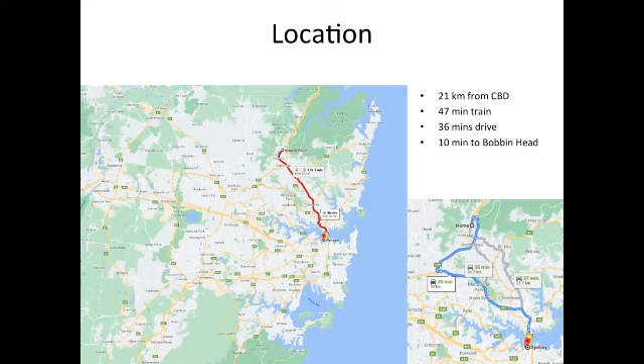And we chose the house because it was within walking distance of a train station. I made these maps of all of the train stations around Sydney, and my family still lives in Chatswood West in the home I grew up in, and my sisters are in Sydney, my older and younger sister, and I kind of wanted to be in the area. So I looked at what could I afford that was within walking distance of a train station.

So being close to the train was really important to me. It's just a 4 or 5 minute walk, and I've run it in about 3 when I'm late for the train. Most people here will probably know all the lovely things about the area, but it's got great shops, parks, great access to bushland and waterways, really lovely schools.

Our kids are at Asquith Primary, gym. We both do CrossFit down at Asquith, and we love getting out in nature on the river in the canoe, and out for bushwalks and things. I do mountain biking, that's my hobby, and we love swimming at the Hornsby Aquatic Centre, and got kids doing swimming lessons there every Sunday. So we love the area and we're really settled in here.

So we chose this house. We bought it in 2016. It was a 696.8 square metre block, about 18.63 metres wide and 37 and a bit deep. So a nice, good block.

It's north facing to the front. From a conventional passive solar design perspective, it's optimal to have north to the rear, into your backyard. But we thought not to worry, it's a great block, it's close to the train station, that's the main thing, and we'll figure out the design to optimize solar orientation if we ever get the chance to knock down and rebuild.

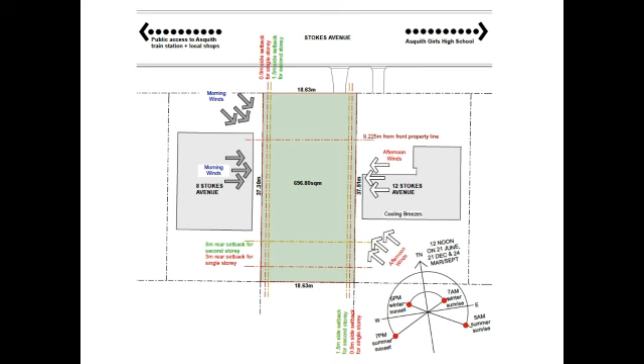So the plans we came up with looked like this: 270 square metre internal area, 5-bedroom house. It's got 4 bathrooms, 2 living, 1 little WC on the ground floor, plus a toilet and ensuite for the guest bedroom on the ground floor. Then it's got an ensuite in the master bedroom and a toilet upstairs for the kids. It's got a ground floor living space and a rumpus room on the north corner, and a study down on the north side as well for me - that's where I am now. It's also got a little gym room, because we're both into fitness, and the garage on the side.

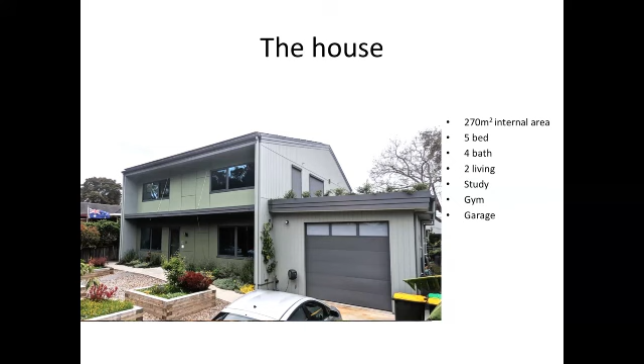The plans turned out pretty true to form, so there's the finished product. I took that today - it was a bit of a grey day, but you can see it really does look exactly like the design, which is always pleasing. And there's one of the more architectural photos we've had taken. It's a timber-clad building, timber frame, well insulated. It's Passivehaus certified, and it's the first Green Star Homes rated building in Australia.

So why is it a sustainable house? Well, we pursued Passivehaus certification, which is a German best practice green building rating system, and we went for the highest rating. There's Passivehaus Classic, Passivehaus Plus, Passivehaus Premium - there's actually only 17 Passivehaus Premium buildings in the world at the time this was built. That involves a slightly higher level of energy efficiency than regular Passivehaus, which is already a very high standard.

So we went a bit above that to get Passivehaus Premium, plus the addition of solar, which in Australia is great. We've got a 20 kilowatt solar system, which means it's net zero carbon, net zero energy and emissions. It produces more energy from the solar on the roof than we use over the course of a year. There are times at night when we've got the lights on, hot water heating systems going, and showers and baths for the kids, when it's in deficit, but it's connected to the grid.

It's drawing from the grid at those times. And then during the day, the big 20 kilowatt solar system is exporting about 3 times as much energy as we use out to the grid. So notwithstanding that we buy energy, like everyone, at 28 or something cents coming in, it's like 9-10 cents going out, because the solar system's so big and it's pumping out about 3 times more energy than we use.

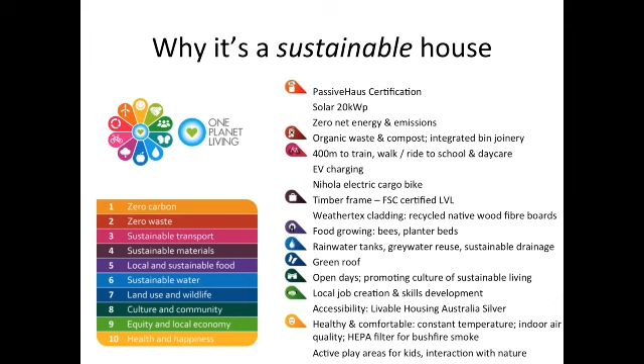So what did it all cost? We bought the site in 2016 for just over $1 million, which is a huge amount of money, but is actually looking like pretty good value based on today's market and where prices are now in the area. So that was just affordable for us back in 2016. And then the construction contract was about the same again. And then there was architectural fees, surveys, etc.

And then some variations and landscaping and planter beds and paths and things that added a bit of cost. So we ended up spending, in terms of buying the land, demolishing the existing house, and then constructing the new house, all the way from beginning to end, $2.3 million in total, which is a lot of money. But we've had the place valued and it's probably above that. It's probably 2.4 to 2.7 now.

So even though we built arguably one of the most sustainable houses in the world, and went a more expensive route than a traditional volume builder, by having a bespoke architect, a bespoke custom builder, and certifying it to the Green Building Council standard, as well as the Passivhaus standard and the Livable Housing Australia Universal Design standard, we've really gone all out, but we're still ahead financially. So we've got a healthy, comfortable house, which is zero net carbon, no energy bills. And in the end, we're still doing pretty well from a financial perspective.

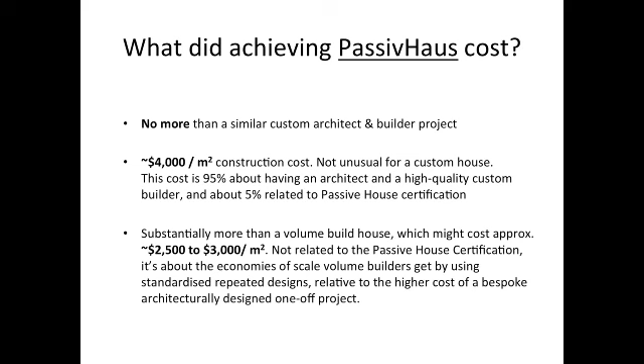It supplies it via a series of tubes into all the rooms via the ceiling, into all the bedrooms, and then exhausts pull it back from little ducts in the ceiling, in the toilets, in the kitchen and in the laundry, and then it goes back through the machine and then out above the green roof actually. But that process of constantly providing the fresh air is what's special and different about a Passivhaus: it's got a mechanical ventilation system. You're not relying on your fresh air to come from opening the windows and doors or leaks through the building fabric.

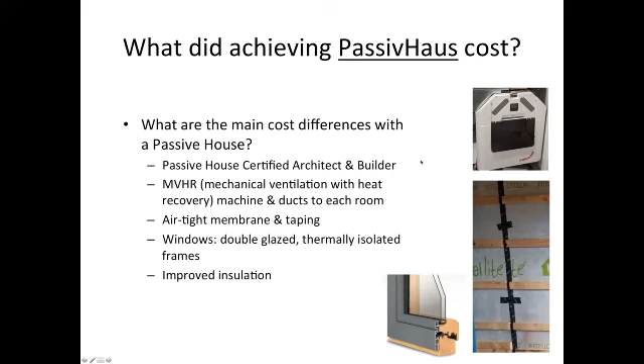And because we did this, we got preferential finance. We got a loan from Bank Australia, who have the Clean Energy Home Loan, for qualifying houses above 7-star in NatHERS, the Nationwide House Energy Rating Scheme, or a passive house. And we were the first passive house to apply for this loan in Australia. So we got a preferential rate on our mortgage. It was 0.6% off the standard variable interest rate at the time, and back in 2019 when we took the loan out, that was a really good deal.

And we've got a fixed mortgage, but it's a discount on the fixed mortgage as well by having this passive house. So there is a financial reward for doing the right thing and building a green home, and other banks now have similar products as well.

So the timeline of the story, we started the process in 2016 when we bought the site. We briefed an architect later that year and got some concept designs done. But eventually I wasn't super happy with what that first architect did, because they weren't passive house trained. So I went back to the drawing board and researched volume builders and got to the point where I'd put a deposit down with a volume builder. But then again, I wasn't happy that they couldn't deliver passive house.

So we saved up some more money. I did a whole bunch of sketches and research and drawing and thinking about how I could make this house into a passive house. And I got a report from a passive house certified designer saying, yep, it would pass if we built my design. Then based on that big process, I briefed an architect who is a passive house certified designer, and he did some concept sketches. Then we did the concept design and the landscape plans, and lodged our DA in 2019.

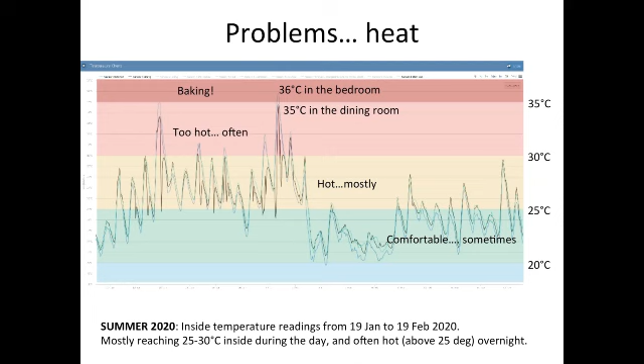I had put temperature sensors in, and in summer of 2020, it was 36 degrees in the bedroom inside. A lot of the time during summer it was in the 30 to 35 degree range, which is way too hot. Most of the summer it was above 25 to 30, often 27, 28 inside. Sometimes it was in the comfortable range, between 20 and 25 on cooler days. But it was really about the weather - whatever the weather was outside, that's what we were feeling inside.

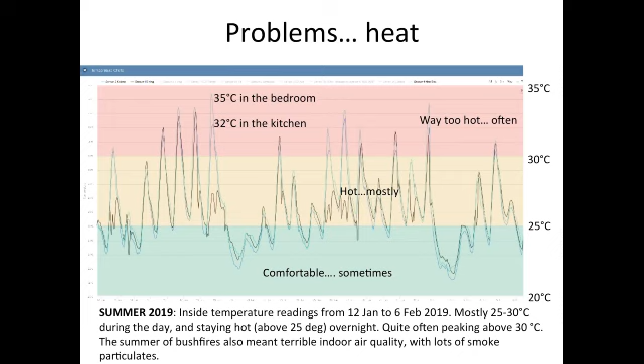Here's the summer of 2019, the previous summer. It got to 35 in the bedrooms and 32 in the kitchen, with peaks way above 30 degrees inside, lots of times. This is a month in summer, I think January through to February 2019, which was a hot summer. But it was mainly way too hot inside in summer.

And of course in summer of 2019, late 2019, early 2020, we had the massive bushfires, and as everyone who lives in the region knows, there was a lot of smoke around from fires, whether that was back burning or the actual out of control bushfires. It brought really bad internal air quality - we were breathing a lot of smoke and particulates in our indoor environment.

And then of course in the winter it was cold. It's 6, 6.6 degrees measured by this temperature sensor outside the old house, and inside it's just 12.6 degrees. This is Tuesday afternoon at 3 o'clock, 12 degrees inside, and we've got the heater on.

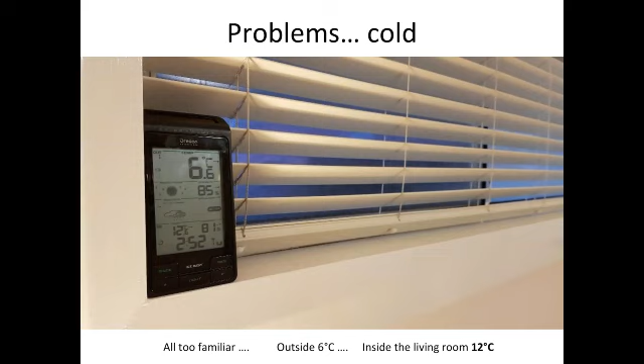This is in the living room. The heater just cannot maintain the temperature because it's single glazing. It's an old house, uninsulated, and you just cannot stay warm inside in those conditions. You have to really rug up and it's not comfortable.

And it's not comfortable for kids - kids watching TV in the winter on the couch had down jackets on and sleeping bags, really rugged up. We had this 2000 watt electric heater, which cost a bomb to run, but it just could not keep the living room warm. We only really warmed the living room in winter and then the kids' bedrooms at night, but it was very expensive to do that and ineffective. It was really uncomfortable.

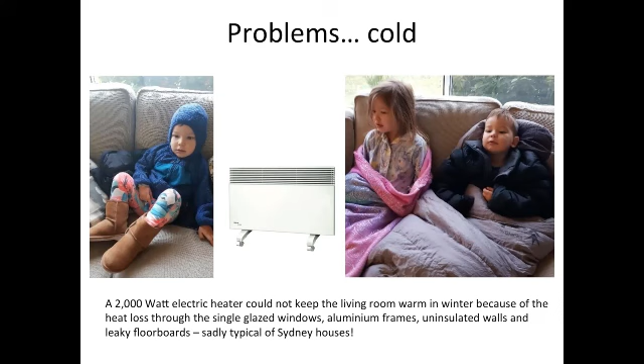And of course all that cold and single glazing means you get condensation on the windows. This is Frankie's bedroom in the morning - she wakes up and there's condensation all over the windows, which trickles down and creates black mold. All around the window frames in the old house had black mold, and it doesn't matter how many times you clean it, it just comes back, because condensation happens when warm, moist air from our breathing meets the cold surface of the glass, forms condensation, the moisture comes out of the air, trickles down the windowsill, and then accumulates and ultimately forms the conditions for mold to grow.

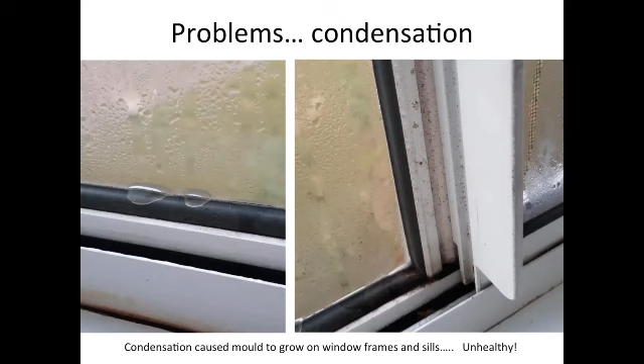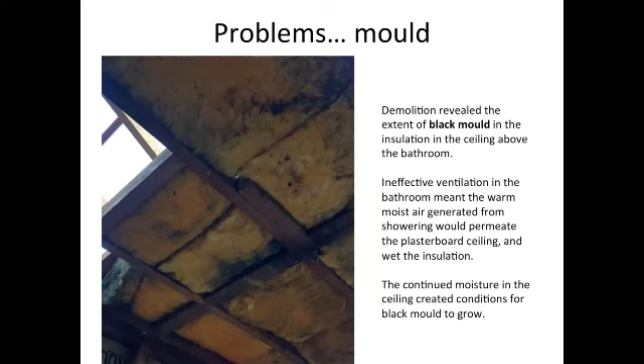And certainly that was true. This is during the demolition, we got to look up into the ceiling void and above the bathroom, the insulation was full of black mold. It was horrible, you know, and that's what happened.

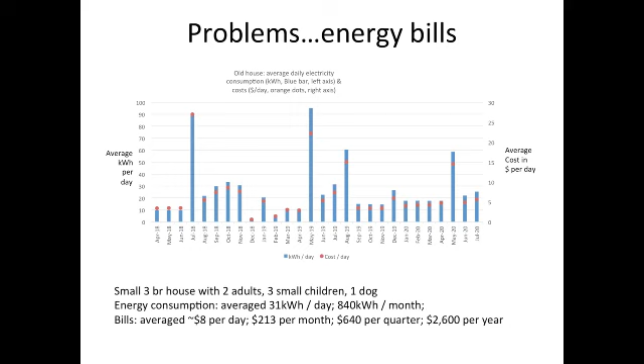And of course it was expensive to heat and cool this building, really inefficient, old, poorly insulated, single glazed, leaky house, cost a lot. There's the old electricity meters and there's the energy costs in kilowatt hours per day. You can see that during winter it got quite expensive, spending a lot of money to keep things warm during those very cold months, which averaged about over $2,500 in electricity bills a year for a really small house.

Anyway, so we had a lot of problems. It was too cold in winter, too hot in summer. It was just impossible to keep it cool or warm due to the leakage through the building fabric, through the cracks in the floorboards, uninsulated floorboards, brick piers down to a void below. You could see daylight through the floorboards, which is classic for an older house. Then we got condensation and mold from the single glazing and the poor quality aluminium frames. We had a lot of black mold in the house, which was unhealthy, and very high energy bills — it was super inefficient.

So, I'm a sustainability person and I knew about the Passivhaus standard and I really wanted to build a Passivhaus, but I wasn't sure if we could afford it or find someone to do it, because in 2016 there were only 4 registered Passivhaus architects in New South Wales. Nobody had any local experience building them because there wasn't one in New South Wales at the time.

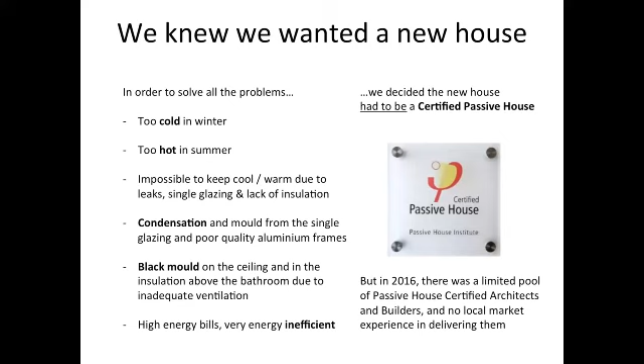But my wife and I met when we were in London. We studied over there and lived there for about 6 years, so it was something we discovered when we were living and working in Europe. It was still relatively new to Australia, even though it's been going in Germany for more than 30 years and in the UK for 20. In Australia, it's still pretty new.

So we hired an architect, and that architecture firm had one Passivhaus certified architect in the team, but the lead architect was not. She produced drawings as the initial concept sketches which were not really consistent with achieving a Passivhaus outcome, then modified them when we said we really want a Passivhaus. We redid it and it was a much more compact form, which is what you want in a Passivhaus — not too many corners, not too many places to tape up and seal.

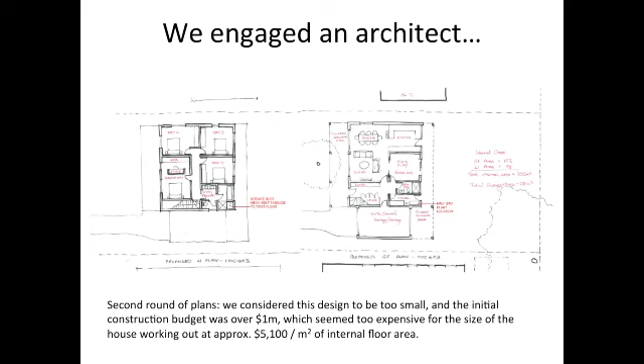She produced a good design, but we got it quoted and it was pretty small and going to be well over $1 million. We were like, oh, we're not sure, so we pressed pause on that. It was going to be more than $5,000 a metre squared, and we said, look, I don't think we can afford that. So we pulled the pin.

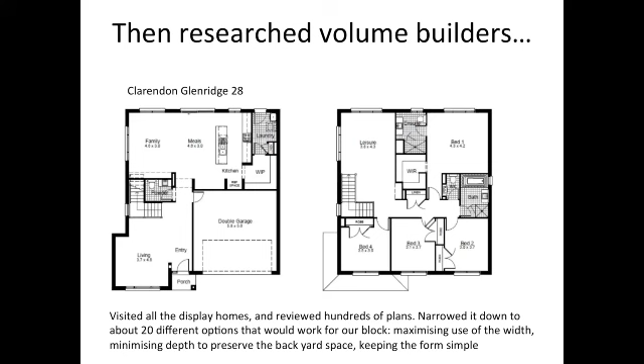So I went back to the drawing board and researched whether a volume builder could build a sustainable house for us. We looked at all of these different volume builders. I looked through hundreds of off-the-shelf standard plans to find one that would suit a wider block and use the width of the block. These were kind of my final selections, which were all good and would have worked on the block.

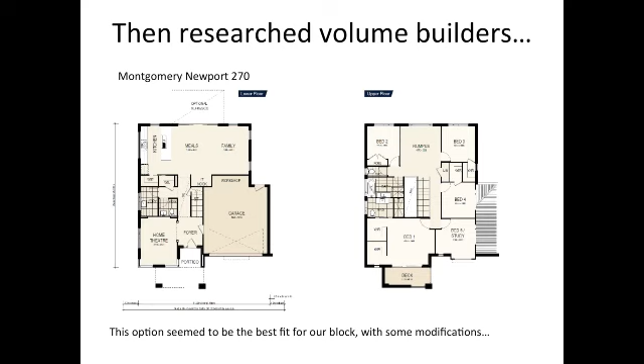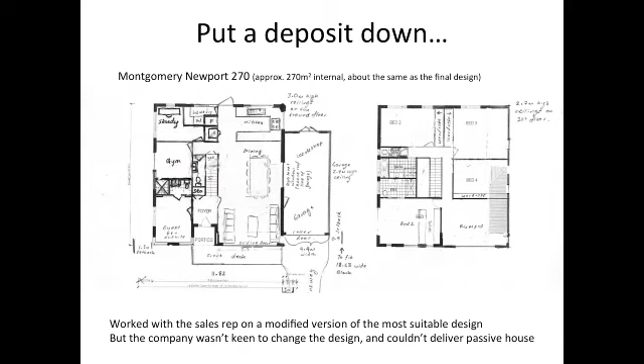I got to this one in the end, the Montgomery Newport 270 square metre house, which I thought would work quite well — not too deep a plan, didn't want to take up too much of the backyard, wanted to preserve space at the back, so a relatively compact shape. Then I got out my pen and said, right, we want to make it even more compact and put the garage on the outside of the thermal envelope, so it doesn't have a cold uninsulated space forming part of the main house.

We got a quote on it and they initially quoted just over $400,000. We paid a refundable deposit to go further down the track, and they eventually quoted my modified design for about $480,000. But I was advised by lots of people in the industry that you need to add at least 30% based on the additions you'll encounter along the way — driveways, landscaping, curtains, and all the things that are not in the base quote.

In order for volume builders to be competitive with each other, they exclude a lot of things from their base quote, so everyone says realistically it's going to be at least 30% more than that. I was thinking it might be $700,000 or $800,000, $2,500 to $3,000 a square metre, but they couldn't do Passivehaus. So I got to the end of the process and said, if you can't do Passivehaus, I'm going to go and do something else. And I got my deposit back.

It involves improved insulation, better windows, fresh air supply through a mechanical ventilation system, and air tightness of the building fabric so that when you close the windows you get efficient heating and cooling because it's not leaky. Of course, you can still use a natural ventilation strategy and open the windows and doors. That's really what the air tightness is about - avoiding drafts and leaks that are a key source of inefficiency in heating and cooling. And then there's no thermal bridges, or reduced thermal bridges, so you're not getting heat leaking out in winter through your window and door frames.

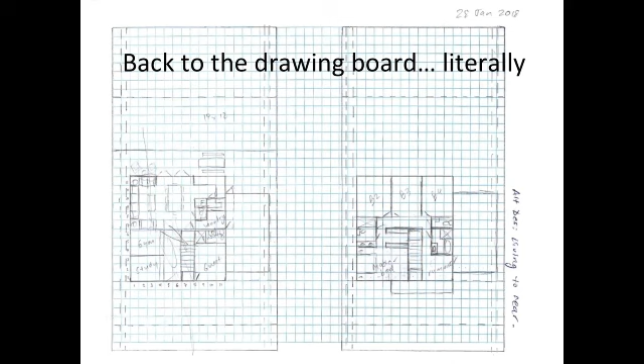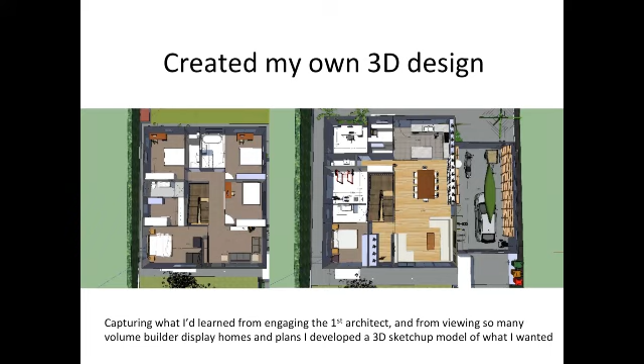So I literally went back to the drawing board after that process and did lots of sketches on graph paper, eventually designing a three-dimensional concept in a SketchUp model, populating it with all the furniture and things we have. That's what I took to the architects, and they were really accommodating, drew it up, and we costed that and off we went.

It's got a kitchen, living, dining at the back, south facing, a big living space. It's got a gym room, a study on the northeast, a guest bedroom on the northwest, and then the big shed garage to the western side, which actually provides a lot of thermal buffer - it doesn't get a lot of hot sun hitting the western side of the living spaces. Upstairs it's got 3 bedrooms for the kids, a rumpus room, and the master bedroom, which has a walk-in robe and an ensuite.

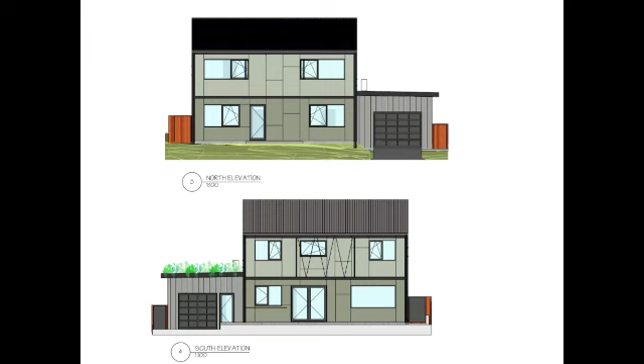So pretty similar design to a lot of what the volume builders are designing as well. There's the north elevation on top and the rear elevation on the back.

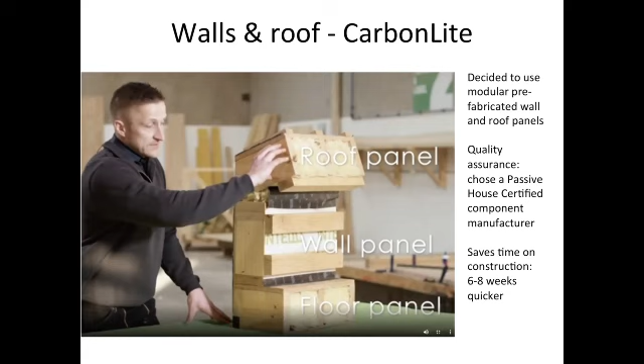We used a modular prefabricated wall and roof panel system built by this company, CarbonLite, out of Victoria, which has insulated roof panels, insulated wall panels, and insulated floor panels. It's manufactured in a factory in Victoria. These are the jigs - they computer-numeric-control cut the timber, then bring it in here and manufacture it into panels.

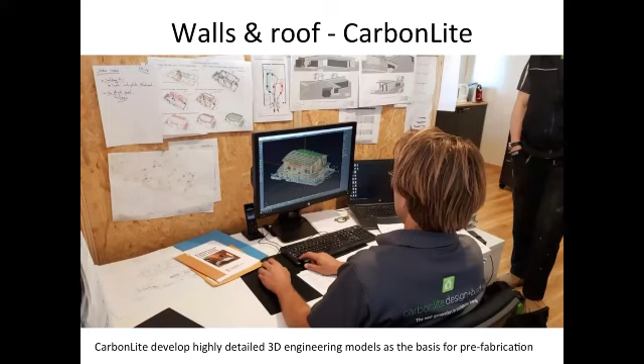And then those panels - it's all 3-dimensional, very detailed design right down to each stud and noggin, they know where it is. They have numbered sequences in order to fabricate them, then numbered onto the truck and numbered to come off, so it's all in a really efficient construction sequence.

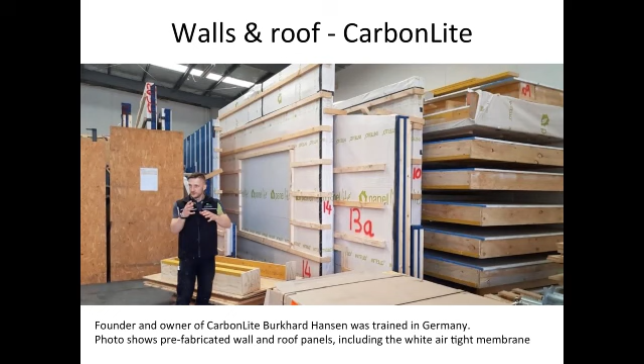So you can see them here - panel 14, 13 and 10 on the pallet, ready to be trucked, and here are the roof panels that get lifted up. This is a bit of a time sequence - we had a time-lapse camera taking photos, and there's actually a YouTube link at the end, but you can see the time lapse of the construction sequence.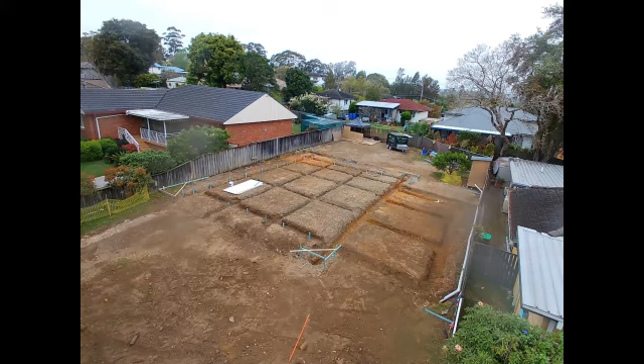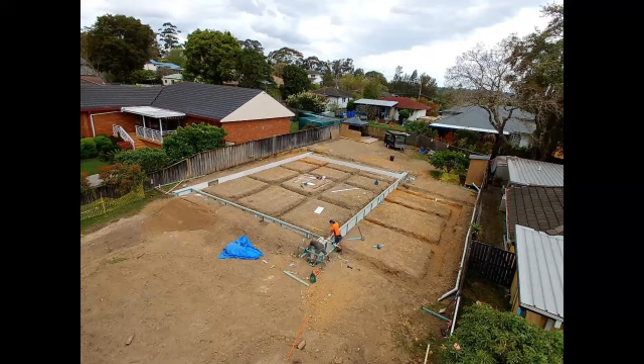And then level site, and then they dug the foundations for the new house. It was a slab on ground, done because in summer there's a real cooling benefit of the big thermally massive slabs sitting coupled with the ground - that's a free cooling effect, because any excess heat in the house goes down through the slab and is evacuated into the ground, if you like.

And then here's the plumbing going in, about to pour the slab. So there's the slab for the house, and then here's the slab for the shed on the side.

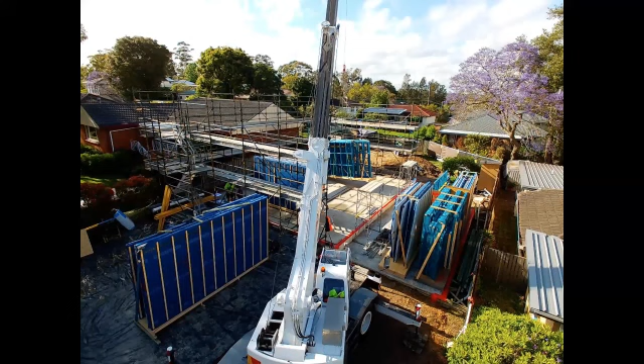And then scaffolding goes up, and you can see the pallets arrive with the prefabricated internal and external walls. The blue wrap on the outside is a weatherproof membrane, so it's really watertight. And there's a white membrane on the inside of the panels, which is an airtight membrane, which gets taped up, and that forms the airtightness barrier, which means it's so efficient. The panels went up in just 3 days.

So the house was a slab, this is sort of day one, and then they go 3 days of craning the panels into place and connecting them. You can see the white airtight membrane comes round from the ground floor around the floor cassettes and joins to the airtight membrane on the top as the panels are placed on the first floor. And then here's the walls going on, the internal stud work and the attic cassettes, and then the roof panels going on. The whole frame was erected from slab to that in just 3 days, Monday, Tuesday, Wednesday.

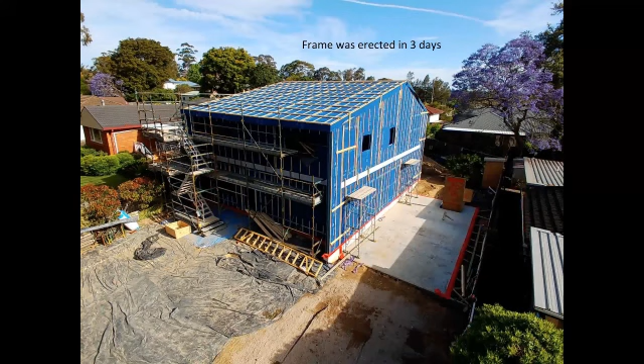And then it torrentially poured on the Thursday, and it was waterproof. Even at that point, we were not getting any leaks in the house, which was incredible because it hadn't been taped up yet. And so here's the garage being built.

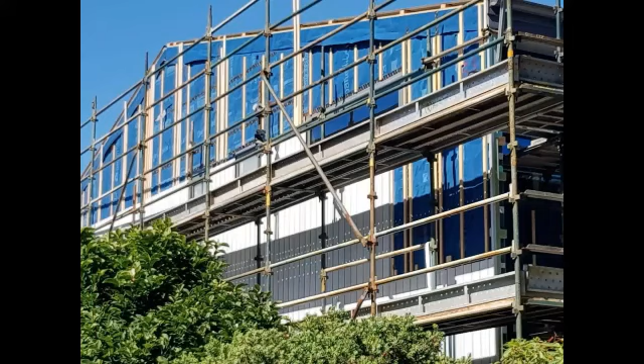It's timber frame as well. And here's the windows. They arrived, similarly, they were manufactured in Poland, procured through a company in Canberra that then trucked them to site in a pallet. And so when the frame was ready, the windows were installed, and then the cladding goes on.

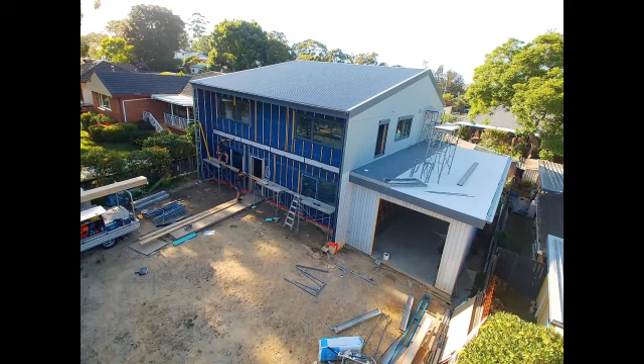You can see those vertically oriented weatherboard panels going on there. And then here's the membrane over the shed roof going down. It's a waterproof membrane on fiber cement sheeting to make the underside of the structure waterproof, because obviously you're going to have a lot of moisture sitting on top of it with a green roof.

So then they put these storm cells down, which provide drainage underneath the growing medium, which is that sort of yellowy, almost looks like insulation. And then there's a pile of dirt, about 5 to 10 centimeters of dirt on top. And that formed the green roof.

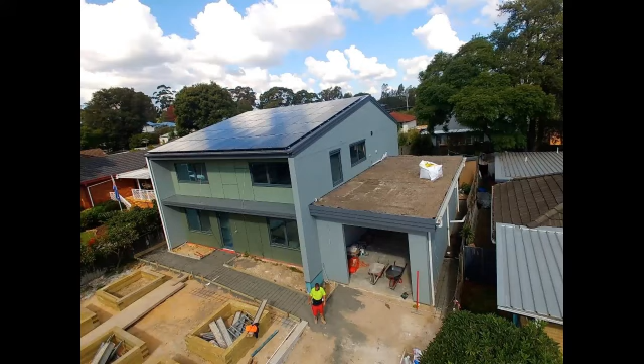And then here they are doing the solar panels. 20 kilowatt solar array goes on, and it's nearly finished. I think it's about April 2020, with the solar panels on, the cladding finished, the paint done, and then just doing the external paths and driveway.

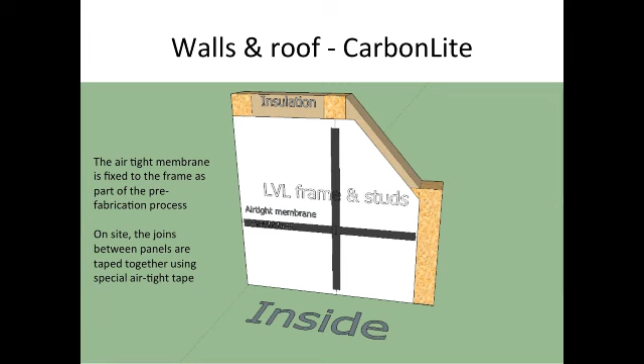So this is really what the walls are made of. It's laminated veneer lumber for the frame and the studs with insulation in between. And then on the inside, there's an airtight membrane, and wherever there's a join in the sheets of this membrane, you tape it with a special 100-year duration sticky tape that's also airtight, and that creates the airtight membrane. And then that's all done in the factory.

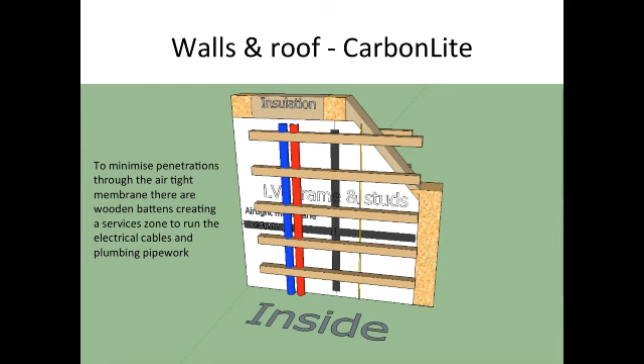The taping's done on site, but the membrane's fixed in the factory. The battens are also on in the factory, and that gives a services cavity to run the pipe work and electrical cabling. On top of the cavity is the plasterboard, so that if you put a hole through to put a picture up, you're not going to puncture your airtight membrane. You've got a 4 centimeter gap between the back of the plasterboard and the airtight membrane, but you do have to not put a drill through it.

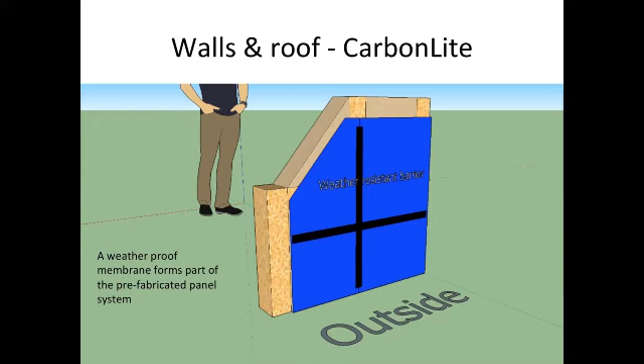And then on the outside, there's the same laminated veneer lumber stud work, the insulation, and then the weather resistant barrier, the waterproof membrane, on the outside. That came in from the factory and then was taped in place. It's also got battens on the outside, and then onto that is fixed the cladding system. You could do any kind of cladding system - brick, fiber cement, terracotta tiles, any sort of external render, whatever you want, to create the finished product.

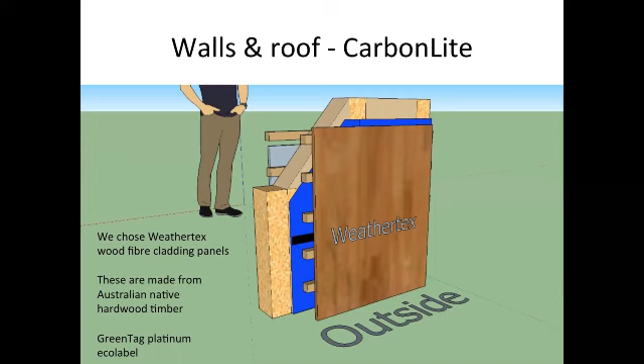But we chose this timber Weathertex. The real smarts is in the middle of the fabric. And then of course the windows are special - they're high performance, German sort of specification, manufactured in Poland, tilt and turn windows.

It's much more durable to have these aluminium frames on the outside of the timber, which is great because they're thermally isolated, so they're not causing a thermal bridge effect, transporting heat in or out of the building. They're attached to the wood with a rubber connector so they're thermally isolated from the timber frame, and the timber itself is full of air pockets and acts like an insulator, so you're not getting any leakage of heat in or out of the building.

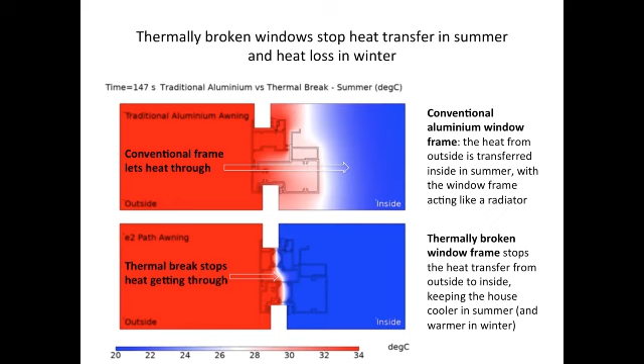That's what happens in a passive house. It stops the heat transfer in summer, and stops the reverse effect in winter. It stops your carefully managed internal temperature from leaking out through your windows and cracks.

It stays in. So this is the Weathertex. It's wood fiber cladding, 97% recycled Australian native hardwood timber offcuts and 3% paraffin wax. It's zero carbon, non-toxic, low VOC, PEFC certified, with a watertight warranty, termite resistant, and actually BAL 19 fire rated as well.

We're not in a flame zone or BAL rated area, even though we're in Asquith and relatively close to the bush. It wasn't a planning requirement to have extra fire protection for this house, but I was thinking about bushfire when we designed it. I was originally thinking fiber cement, but because that's really high carbon, we opted for the much lower carbon recycled timber cladding system, a more sustainable option.

And then in order to provide extra resilience in the case of a bushfire, we actually put an external mounted sprinkler system on the outside of the house so that it can be wet if we have to evacuate in the event of a fire. I'll have some pictures of that later.

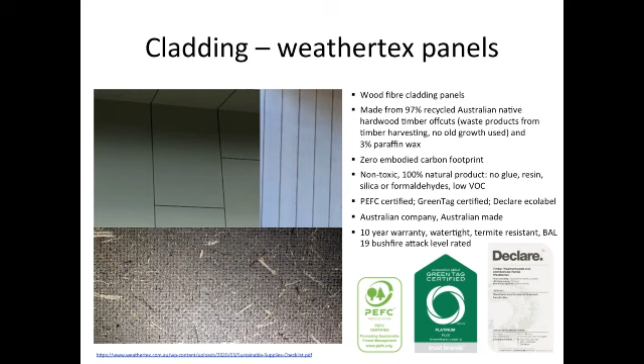It also continuously removes moisture from the air, because as the stale air is constantly pumped out of the building, it carries moisture from our breath and from laundry, showering, clothes washing and dryers. That moisture in the air, as humidity, gets caught in a drain under the mechanical ventilation system. So it means it's not getting humid inside either, because that moisture is constantly being transported out of the building.

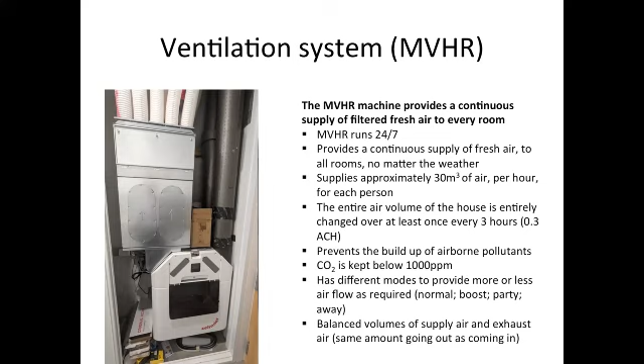So it's the equivalent of an old low wattage incandescent bulb, or the equivalent of a compact fluorescent light, one light. So it's constantly doing fresh air for your whole house with the equivalent of a light bulb's worth of energy, which is tiny, really, given what it's doing for your health and for your comfort. And that's more than balanced by the energy efficiency it saves in terms of heating and cooling.

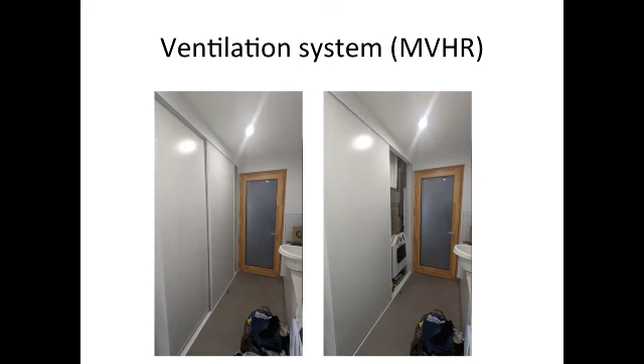So the ventilation system, our one, you can see on the photo on the right, it sits in a cupboard in the laundry, takes up space of about the size of a small fridge. But yeah, it's just tucked away in the laundry and it just does its thing, continuously providing fresh air to the house. And that's really one of the secret ingredients of a passive house, is a mechanical ventilation system.

And so this is the fresh air rate that corresponds with good air quality. It should be around 8 litres per person per second. And that's what Passivhaus delivers. It delivers sort of 8.3, or 30 metres cubed per hour. And that means that it's the equivalent of what you'd experience in a high-end office.

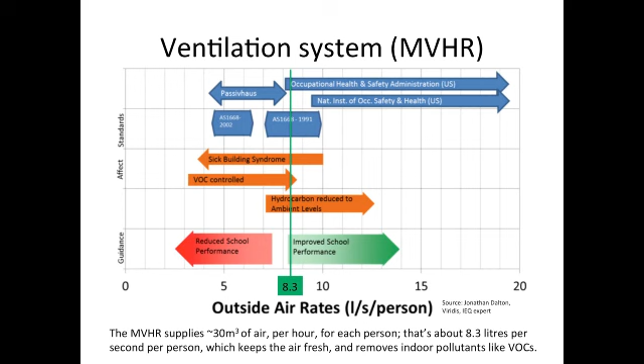It's a nice continuous supply of fresh air that means you never feel stale or stuffy or uncomfortable. And that means you have better concentration, you sleep better, and you don't suffer from drowsiness and headaches and the other things you can get from indoor air pollution.

And this is a study of 29 buildings in Australia. Most houses in Australia are naturally ventilated, and you can see the blue humps are a whole year for one house. And the blue humps represent the CO2 in the air over the course of a year and how much at various times. So you can see the peak of a lot of the humps is on the right-hand side of the blue vertical line, which is the 1,000 parts per million.

So a lot of houses are operating all the time over 1,000 parts per million of CO2. And some are even spending a lot of time above 2,000. You can see there's one outlier that spends almost all year up in the 2,000. That's unhealthy, that's bad for you. But the Passivhaus is the one down the bottom, and it keeps the CO2 in the indoor environment well below 1,000, much more like background levels of 400 or 500 most of the time. So that's what Passivhaus does for you.

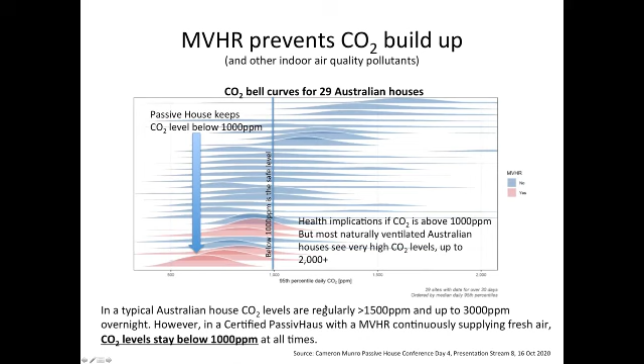It means you don't get indoor air quality problems. And there's no drafts because it's airtight. The air supply doesn't feel like there's air moving. It's carefully calculated so that it's just enough to be comfortable, but you're not going to notice a perception of a draft. And it's really quiet. You can put your head right next to that machine and you cannot hear it running. It is super quiet. And the air distribution, there's no noise from the ductwork or no sort of whooshing sound of the air through. You just do not hear it.

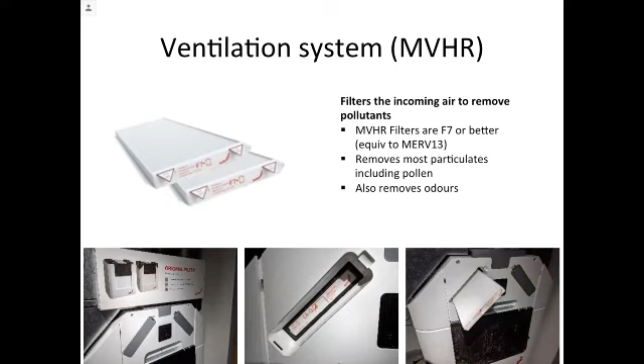It is absolutely silent. And it's got filters, so it's constantly filtering out any dust or pollen or particulates or bushfire smoke in the air. So you get a very healthy indoor environment as well, because none of that stuff is coming inside. And it also removes odors as well, so it always smells nice inside. And so we added a sort of special additional unit to the mechanical ventilation system, which is called a HEPA filter, a high efficiency particulate air filter.

And that screens out even the worst of the bushfire smoke. So we can open this little flap at the top where the red arrow is and insert this enormous filter during a bushfire event, and we will not get smoke inside, and we'll be breathing easy inside while, unfortunately, the outside air is going to be actually really bad for your health.

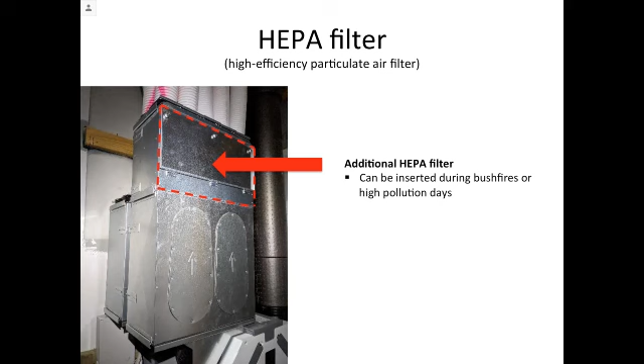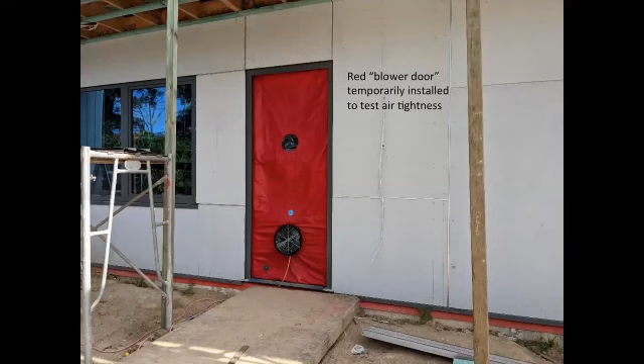And part of Passivhaus is that you get a blower door test. So this red thing is a temporary little bit of fabric that goes into the door frame, and then there's a fan running that pressurizes and then depressurizes the house, and it's got to hit a certain level of airtightness, 0.6 ACH, or less than 1 m³/m²/h leaking out, which is tiny. It's the equivalent of like a hole the size of a 20-cent piece.

It's got to be that airtight so that when the doors are closed, when the windows are closed, you've got really efficient heating and cooling. And don't forget, you're still getting the fresh air coming through the mechanical ventilation system. So it's not like you're suffering for having the windows closed.

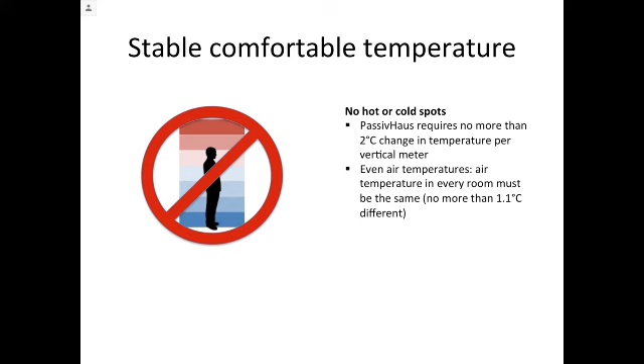And what all that means is that Passivhaus keeps temperatures stable inside. You don't get hot or cold spots in the house or in the fabric, there's no hot frames in summer or cold frames of windows in winter. And it's even air temperature throughout the house. And that prevents condensation and mold.

Condensation forms where warm, moist air meets a cold surface. And there's no cold surfaces in a Passivhaus due to the insulation and the avoidance of thermal bridging effects. And what that means is that the surface temperature of any interior surface is very similar to the air temperature. And that means that the moisture can't come out of the air and hit a cold surface and form condensation.

And in addition, the humidity is controlled. So relative humidity in a Passivhaus is controlled between 40 and 60% relative humidity, and it must not exceed 60% for more than 10% of the year. And that means mold can't grow, because mold can only grow where relative humidity is above 70 to 80%. And that happens a lot on the rainy days and on hot, humid summer days. We get relative humidity in summer well over 80% outside a lot of the time.

And so a Passivhaus controls that humidity, and the surface temperature and a constant exchange of air through the heat exchanger and the mechanical ventilation with heat recovery unit means that you do not get condensation anywhere in a Passivhaus, and that means mold can't grow. So it's much healthier. And that also means the airtight membrane and the weatherproof membrane can shed water out of the fabric. If any water could get in, it can always get out.

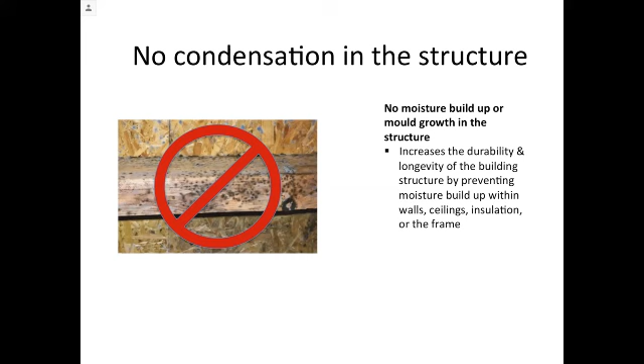And what that means is you don't get structural damage from mold and condensation in your stud work either, which is actually a hidden structural problem in a lot of houses. It certainly was the case when we took the linings off the old house. We could see that there was rot and there was structural damage from moisture being stuck in the house. And normally houses rely on just being leaky in order to ventilate that structure. But the more modern methods of construction can end up trapping moisture in the fabric. So Passivhaus solves that problem too, which means it's durable and a long-lived construction.

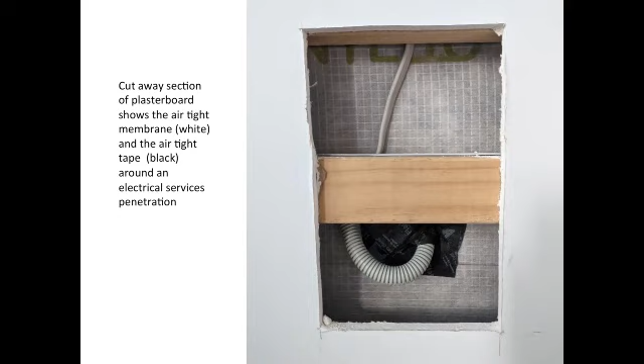There's a little cutaway behind the plasterboard. So you can see the plasterboard, the battens, you can see the airtight membrane, you can see an electrical penetration coming through the wall.

We've got ceiling fans in every room to provide sort of the free cooling effect of air moving and cooling the skin through the evaporation of moisture from our skin. That free cooling effect we can exploit in summer, but we also do have an air conditioning system. We really did this because of heat waves.

And that means we don't have heating. We don't need it. We've got the reverse cycle air conditioner. We can do heating if we needed it, but we don't need heating. In a passive house, the temperature is always between 20 and 25, so you don't feel cold. They're designed to avoid the need for heating. Just people's body heat, the refrigerator, the solar gains that are carefully calculated and balanced mean that you don't need heating and you don't have cold kids, which is nice.

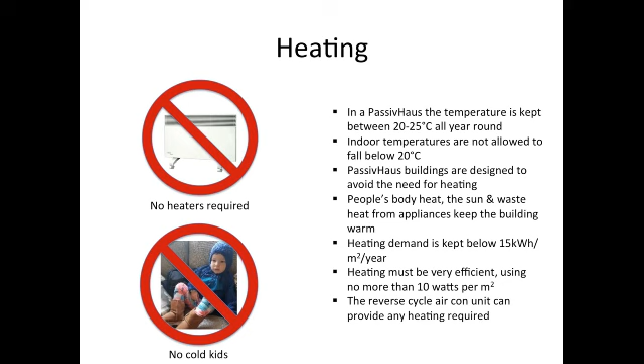So it's really efficient, and it's not using harmful refrigerant gases. It's using CO2 as the working refrigerant, so it's a really environmentally friendly system as well because there's no refrigerant leakage.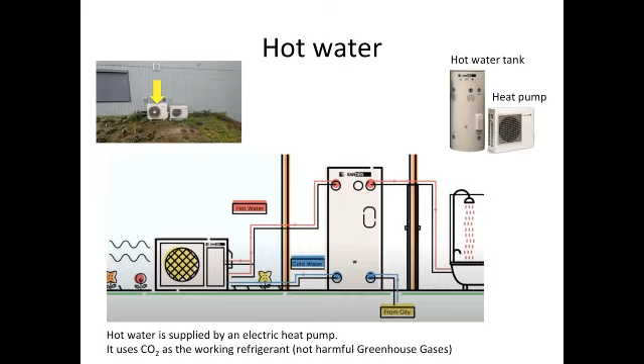And it's got 10,000 litre rainwater tanks underneath as well, underneath the driveway, that is. You can see them being buried here. And the drainage from the roof comes into that and then is recycled for toilet flushing and the landscape irrigation system. And there you can see it finished. It's just one of the access hatches to the tank that's sort of integrated into the garden bed where we're growing a hedge.

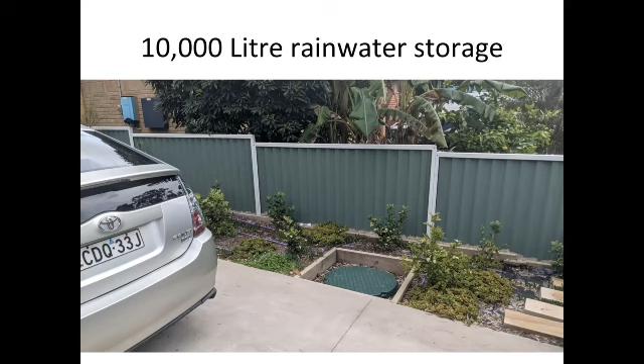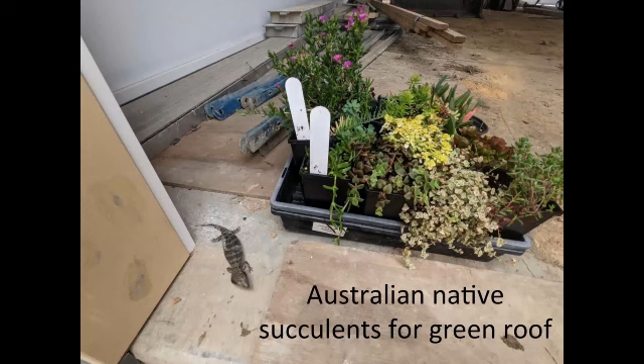We've got native Australian succulents primarily. I think there's only a couple of non-native species, maybe one or two on the roof, but the bulk of it is native Australian succulents. You can see a beautiful little blue tongue lizard there checking it out. But then the green roof got planted out. So we planted the plants there.

They were supplied locally, and it's growing really nicely and eventually will form a really lush green layer when it gets fully established.

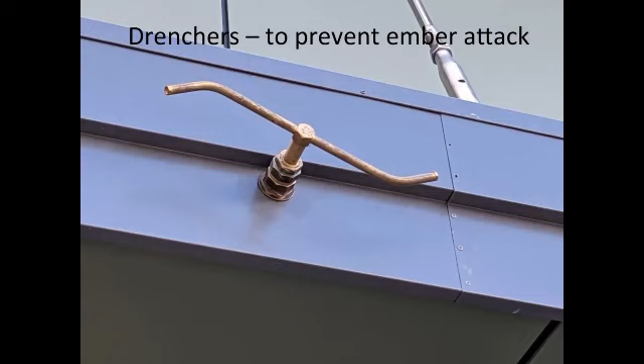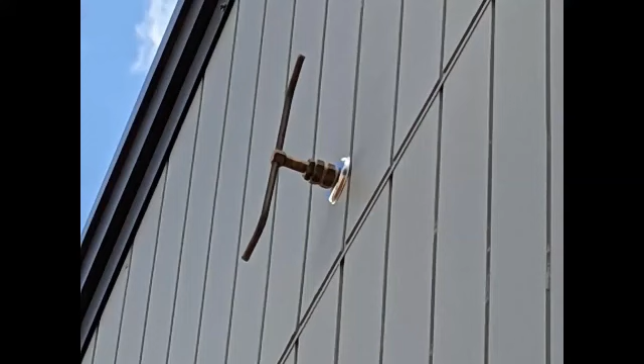All electric again, so we've got electric induction cooktop and stove, and these are the surface mounted drenchers, so that when there's a bushfire, which of course there will be, and Ku-ring-gai National Park is up in flames and it's raining ash on the house, we can - it's a pretty resilient building structure, metal roof and solar panels, and the timber cladding is fire resistant to BAL 19 levels, but we've also got these surface mounted drenchers which will wet the entire outside of the house if we need to evacuate. It gives it a little bit more resistance and resilience to ember attack in a fire, which most people here will have experienced. It's pretty horrific.

It's got native plants in the landscape, but it does have some food growing. We've got fruit trees in the front - an almond, an avocado, a mango, a couple of mulberries, and some orange and citrus, which is great. It's established well. It's only a year in, but the garden's going really well.

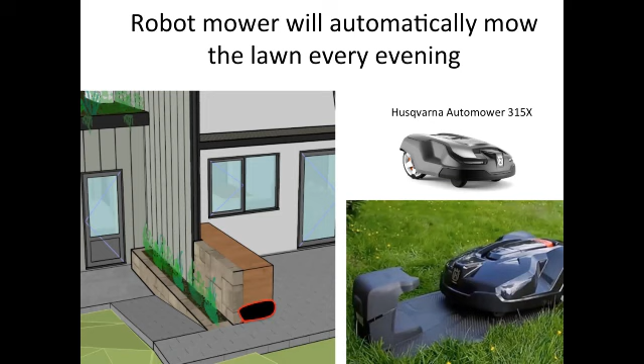We love it. And it's got a robot mower as well - it's super cool out the back. This mows the lawn and means that I don't have to do it, which is awesome. It's kind of tucked under a little barbecue area at the back.

This was formerly in the old house - we have this beautiful orange tree and food growing, and we've got chickens, and they're under the trampoline in that nice little convenient spot. They've got a chicken house out the back, and we let them out, of course, but it's all fox protected there, which is good.

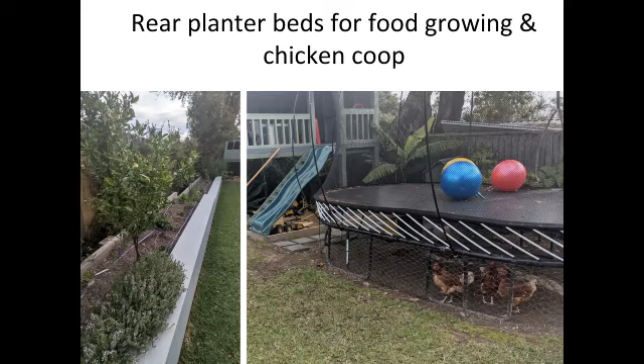And then we've got garden beds going around the edge, the perimeter. You can sort of see in the plan, there's perimeter garden beds around the edge of the backyard as well, where we've got herbs, tubers, asparagus and all sorts of things growing, which is great. And I built that cubby house for the kids, which is nice. You can see the chickens underneath the trampoline.

I'm a beekeeper, so we had bees at the old house, and we get sort of 50 kilos of honey a year, but we haven't got the bees yet. We've got the spot for it upstairs, but we haven't put them in yet.

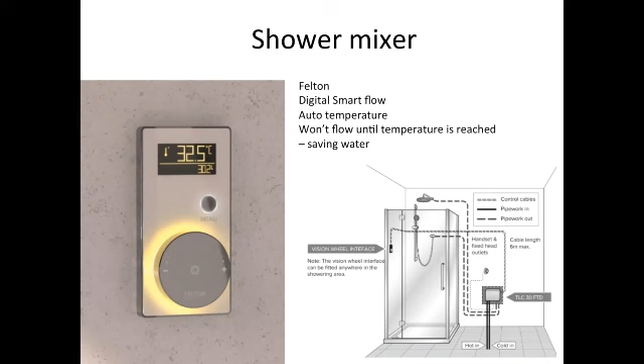It's got Japanese toilets, bidet toilets, which is super cool. And then this awesome tap called a Felton digital smart flow tap in the master ensuite, where you just press the button and it gets to the right temperature and tells you how much water you're using, which is a super cool sustainability feature. And then this is our little second car, the electric cargo bike that we use to take the kids to school and daycare, and it's a recent photo.

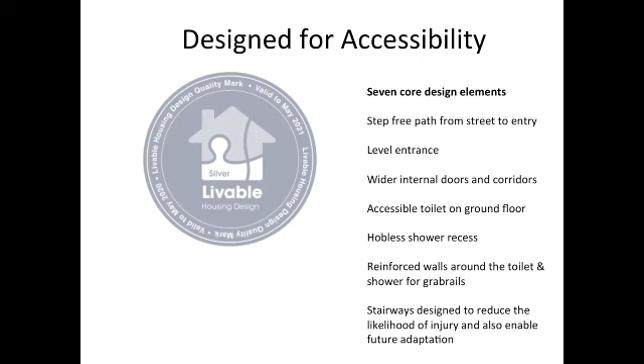And of course, it's designed for accessibility, which I mentioned at the beginning - it's a step-free path from the street into the entry of the house. It's a level threshold, so there's no bump at the door. It's got wider internal doors and corridors, an accessible toilet on the ground floor, and a hobless shower, so there's no step at the edge of the shower. It's got reinforced walls so you can install grab rails, and the stairways are designed to reduce the likelihood of injury, so there's three flights with landings, quite large landings.

And so there's the level threshold at the entrance, there's the accessible bathroom, and there's the ramp-based entry from the driveway into the front door with no steps that you can see there again. And there's the solar on the roof, 20 kilowatt solar, and my dog making an appearance.

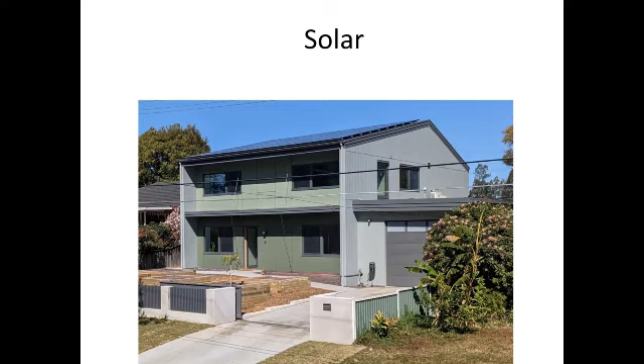So the north facing pitch of the roof is completely covered in solar panels, 50 solar panels, 20 kilowatts of generation. And we were, I think, the third building in Australia to achieve - we're about the 38th house building of any type in Australia to achieve passive house of any kind, the third in New South Wales.

And we were the first in New South Wales to achieve Passive House Premium, and only one of 17 in the world at the time to achieve Passive House Premium, that top level. And we were the first project in Australia to get the Green Star Homes certification. So there, I'm proudly displaying my certificates on the front door.

A bit of detail about the rating - Green Star Homes and Passive House work really well together, because Passive House is sort of world's best practice: energy efficiency, windows and doors, avoiding thermal bridge effects, air tightness, and limiting energy consumption, plus renewable energy, air quality, and moisture control, and then a really rigorous design and construction quality assurance process.

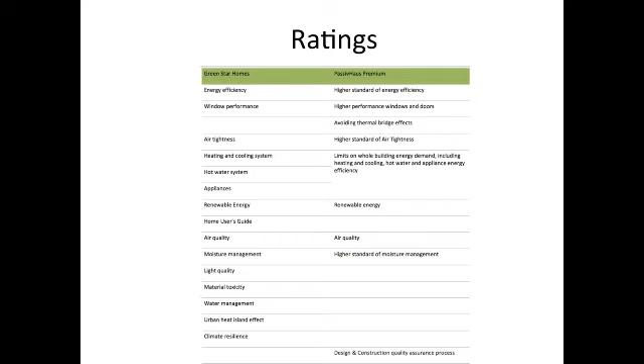In addition to that, Green Star adds efficient appliance controls, lighting, materials credits, water management, and climate resilience. So they work really well together. There's a thing called a crosswalk, which shows how Passive House helps with Green Star Homes, and likewise the reverse.

A little refresher on Passive House: good insulation, improved windows, mechanical ventilation system, airtight membrane, and avoidance of thermal bridge effects. As I went through at the beginning, it's low waste, sustainable materials, water sustainable as well, and really healthy and comfortable.